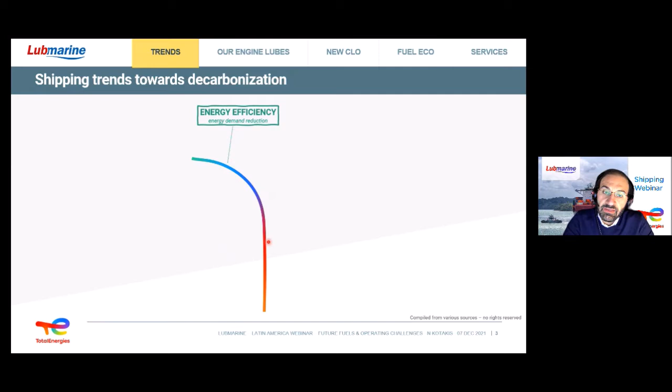So shipping is certainly under scrutiny, is certainly under stress. Everybody's looking forward to this decarbonization. Wanting it or not, it will be there and it will accompany all our actions in the coming years and maybe the coming decades. And the most important is to see, when we talk about decarbonization of the shipping industry, what are the big categories in this. So the first one is the energy efficiency. Clearly, when we want to reduce our CO2 emissions, we have to reduce our energy demand. This is straightforward, this is clear, and this is the first of the 4 pillars of the decarbonization, the way we see it. The second big pillar is the propulsion efficiency.

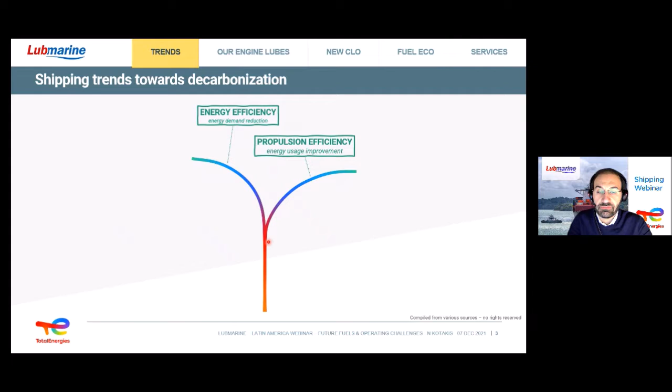So, assuming that we have done everything we can in order to reduce the demand, the next pillar in this process of decarbonization is to improve our energy usage, is to become more efficient. And in the case of the ship, this goes back to propulsion. The third is self-explanatory, the use of low carbon energy. So apart from the efficiency efforts that we did in the first 2 pillars, in the third one, we change the fuel itself, the energy source itself, into sources that are less carbon intensive. So this is our intervention on the carbon intensity of the energy source that we'll be using.

And the fourth pillar is the carbon capture, which means how we can capture all what is emitted as CO2 from our ship after having followed the path of these 3 pillars before reaching the capture, the fourth one.

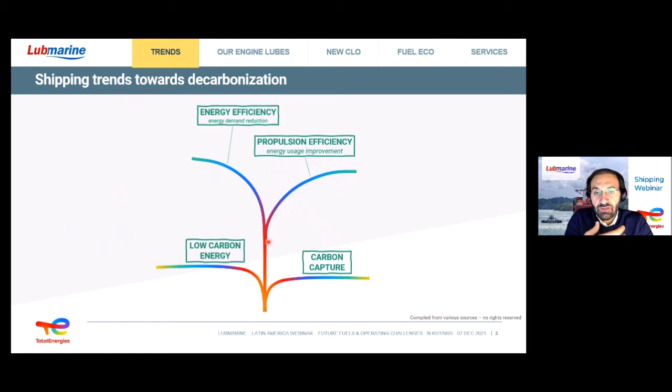So when it comes to energy efficiency, we can split this into 2 big branches. The one is the vessel design, and vessel design is a one-off process. It is linked to the genesis, to the very construction of the ship, with the form optimization, the optimization of the ship size dimensions, the weight, the use of materials, the use or not of a bulbous bow, new hull coatings, air lubrication, and so on and so forth. All this gets under the category of vessel design in energy efficiency.

Then we have another part which has to do with the operation of the ship. So the first one is design, the second one is operation. And in the operation, we find all the measures that we have to employ in order to improve our efficiency, like the speed reduction, advanced port logistics so that our port calls will be shorter and our standby time outside ports will be minimized, the weather routing, the cleaning of the hull, the propeller cleaning and polishing, and so on and so forth.

These are known to the market already because this is what we know as EEDI and EEOI, which will become EEXI, so the Energy Efficiency Design Index and the existing ship index as well. Now, moving to the propulsion efficiency, we focus more on the powertrain. So the powertrain is the engine, the propulsion, and the shaft machinery in the propeller.

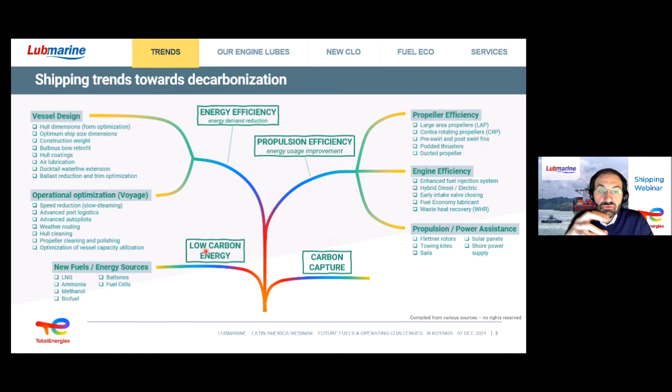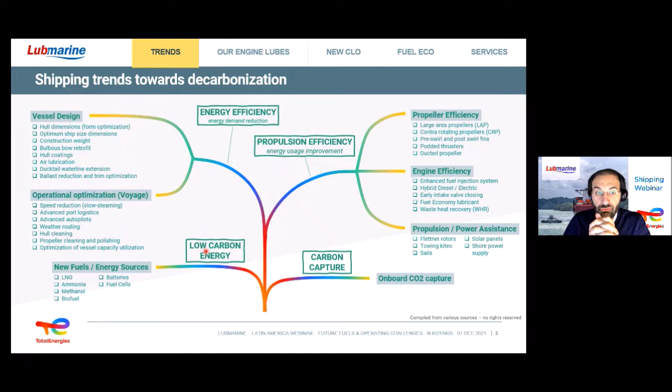Now, moving to the low carbon energy, things are pretty straightforward. What you will see here is new fuels and new energy sources. So we have LNG, ammonia, methanol, biofuel. You've heard this already in many different fora, in different conferences. We have also new energy sources like batteries or fuel cells. And finally, the carbon capture, which is more of an ambitious future development, relating to onboard CO2 capture.

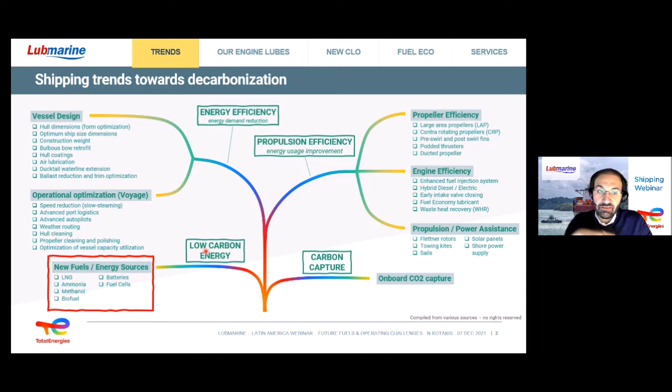Now, in the next slides, I will focus a bit more on the new fuels and energy sources because I think this is what seems to be a driver in technological development, knowing, of course, that the energy efficiency and propulsion efficiency are very important, but have already been covered very well, and there are many known and mature solutions already out there in the market for the operators to use.

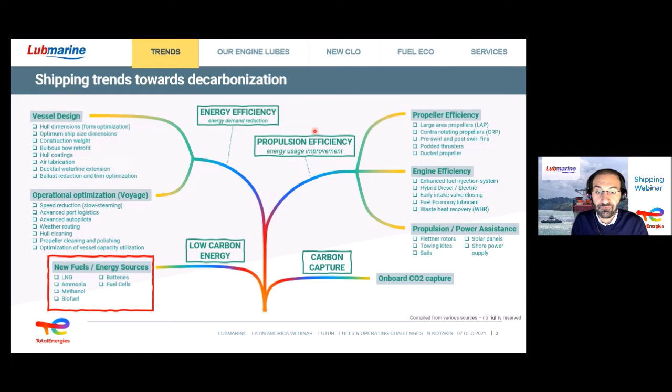But before talking about the new fuels, we have to talk about the new engines. So there are efficiency evolutions on two-stroke and four-stroke engines, and they can be split into categories. We have the incremental evolutions of the internal combustion engine, an engine which is well known. It was designed by Otto back in the 19th century. Then we had the Diesel cycle by Rudolf Diesel, the Otto cycle, then the Miller cycle.

Since the time of Rudolf Diesel, many things have been improved, and we still continue to improve all these small parameters like turbocharging, variable port geometry, smart control, electronic control of the engines. We have an increase of the mean effective pressure, and we are working on the reduction of the friction losses of this engine.

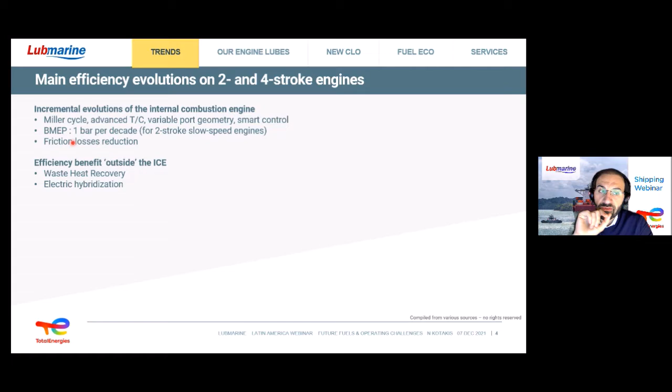At the same time, we have the energy efficiency outside the internal combustion engine, so a post-treatment efficiency related to the waste heat recovery or even to electric hybridization. Now, I would like to focus on 3 points here. The first one is the mean effective pressure.

So we see over the last years how much the pressure has raised, because the pressure is directly linked to the performance and to the efficiency and to the specific fuel oil consumption of the engines. So the higher the pressure, the lower the consumption. So it's a key part of the engine efficiency.

Now you see that in the next coming decade, we should expect another increase of about 5% in the pressure. And this is something that we see both, let's say, the two bigger OEMs in terms of sales, MAN and WinGD, converging to this possibility for the future engines.

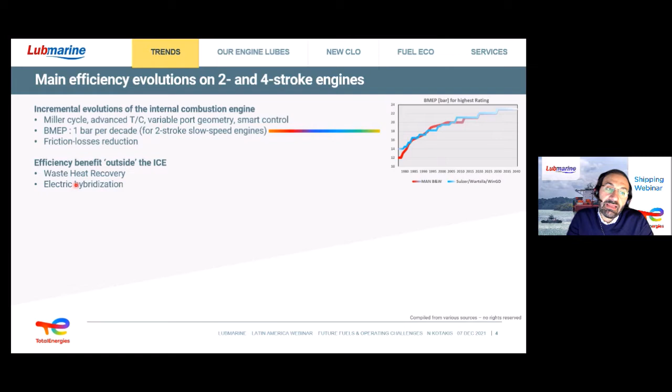The second point I would like to note is the electric hybridization, because this is linked to a potential electrification of the powertrain. And this can be very promising for an efficiency increase. And you see here how this could be the arrangement in an engine.

So you have a main engine connected to a shaft generator, which at the same time, if it is given energy, it can be turned to an electric motor. And then from the shaft generator, we have the battery pack, frequency converters, and we have the auxiliary engine. So with all of the systems, we can either move power from the main engine to the system and to the batteries, or from the battery pack back to the shaft propeller and to the propulsion of the ship.

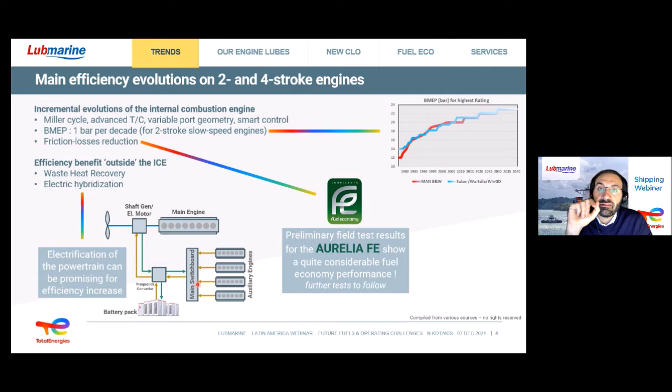And the third point that I would like to underline here is the friction losses, and this is directly linked to the development of fuel economy lubricants. So fuel economy lubricants show a considerable performance, at least the one that we have designed; it is very, very promising. There are further tests to follow.

In the coming slides, in this part here, where you see on the top right side the fuel eco, I will give you some more information about what we've already seen and what we aspire to see in the future in the field of a fuel economy 4-stroke engine lubricant. And I would dare to say, of course, that they are certainly an option to consider given their interesting cost to benefit ratio.

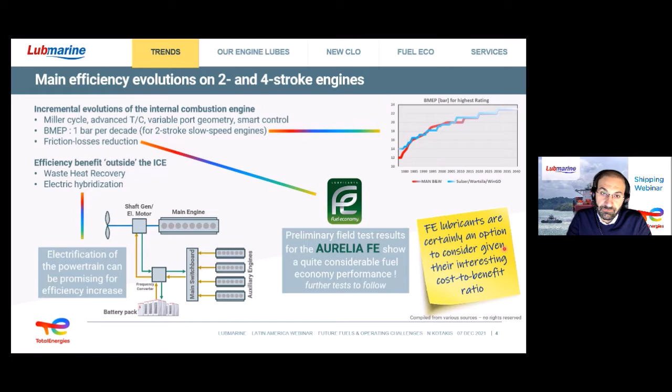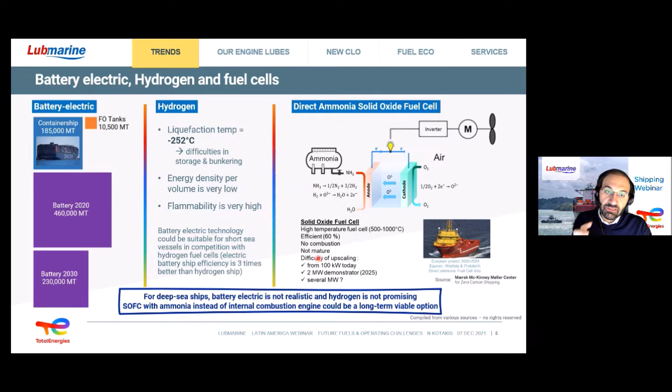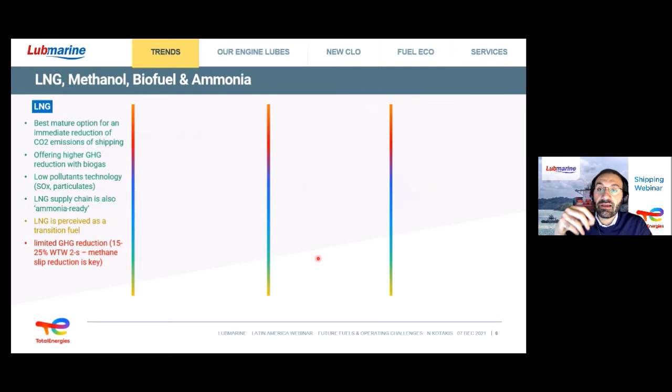Let's go a bit closer to today, where we have the LNG and other options that we hear in the news and in scientific papers all around: the LNG, the methanol, the biofuel, and the ammonia. So LNG is the best mature option for an immediate reduction of CO2 emissions today. We know this. We know that it has low pollutants. It's a supply chain which is well established and it can be also ammonia ready. So there is a link with the future option, but it is still perceived as a transition fuel with limited reduction of greenhouse gases.

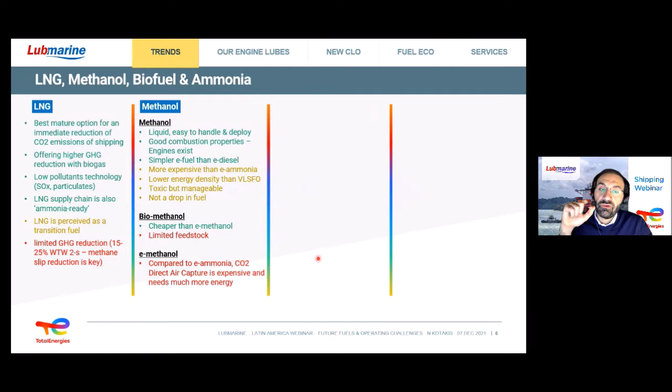The methanol, there are different options, different derivatives, the pure methanol, the biomethanol, the e-methanol, all of them have their own set of advantages and disadvantages. We would say that the most difficult part in methanol is that it's not a drop-in fuel. We cannot use it right away. There is a lower density, of course. It is more expensive, but it could be an option. So keep this, that methanol seems to be a viable option.

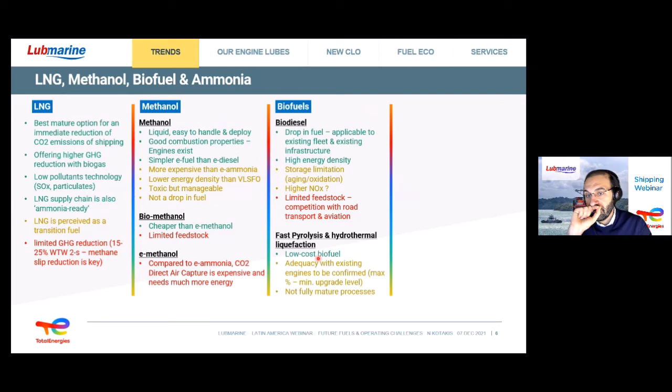Biofuels as well, especially the biodiesel, can be an option, can be a drop-in fuel, which means that we can use it seamlessly with the fuels that we have today. It has a high energy density, but there is a limited feedstock and there can be a huge competition with road transport and aviation. So this means that when the demand of a commodity like biofuel increases, the price will increase as well, because we have a limited feedstock, which means that we cannot increase the supply at the same time. So most probably it will be used at more premium prices at different markets.

Finally, the ammonia, the NH3, is the real zero carbon fuel. It can be used in combustion with a dual fuel engine or used in the SOFC configuration, as I showed you in the previous slide. There is no apparent competition with other transport modes, so it can be perceived clearly as a fuel of the future. Now, all of them have, as you see here, a set of advantages, some considerations in yellow and some disadvantages in red.

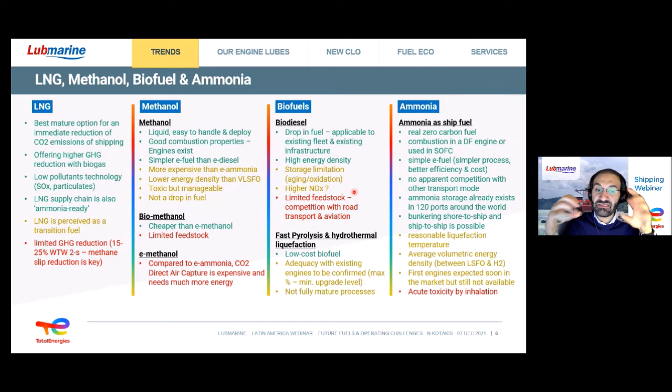This is not an exhaustive list of advantages and disadvantages, but what I aimed at showing here is that all of the above solutions are expected to be employed by the shipping operators in the future. What cannot be said for now with certainty is the adoption rate of each of these solutions, because it will depend on a series of technical, economical, and logistical factors.

If I had to make a forecast, I would say that most probably we'll move from LNG to a bifold solution between methanol and ammonia. And biofuels, given, again, the competition with other markets, could be a bit less interesting for the shipping market, at least cost-wise.

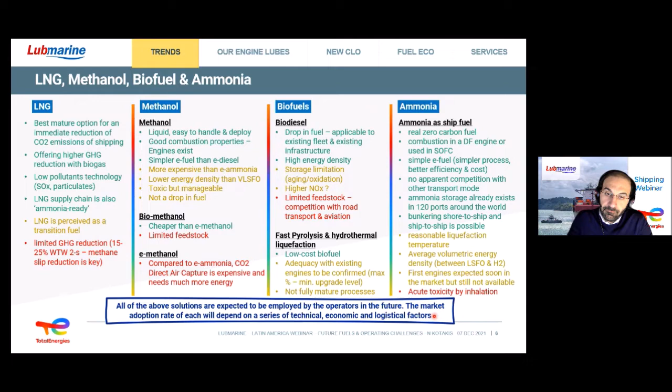Now we'll move on to a quick overview of our engine oils portfolio. And I would like to start by seeing our Talusia range and the product commercialization timeline. So you see our Talusia is our flagship range. It is our cylinder oils used on two-stroke engines. And the development of our grades is certainly linked to the sulfur content of the fuels. And in the sulfur content of the fuels, we have to see the global sulfur cap and the sulfur emission control areas.

So for the last 20, 25 years now, we had Talusia HR70, our BN70 grade, which along the years was covering different ranges of sulfur content. This is also linked, of course, to the engine design. So we have the BN, the Talusia part, the sulfur content in the fuel, and also the engine design, and they all interacted together in order to give us the ranges that you see here for all of these different grades.

Along those years, we also had LS40. So you see that these are two grades, the BN70 and the BN40, which have run through almost a bit more than two decades, maybe even more than that. And they have been covering the market at different circumstances for different limits.

Around the year 2007, we had the introduction of Talusia Universal, which today seems as the perfect fit between ships that are operating on VLSFO or even dual fuel engines, and even in some cases as a low BN for scrubber equipped engines. We will see more about Talusia Universal in the future because it is a solution which certainly answers to many of the customer and operator needs.

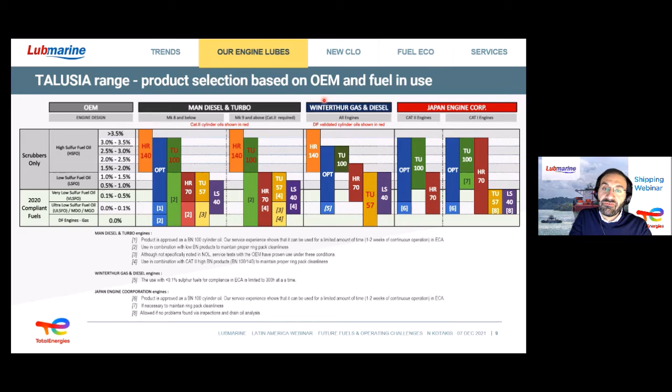So the Talusia range, as I said before, has 6 products in our portfolio to cover all your needs. You don't have to remember this by heart, but you have to know that our marine lubrication engineers, our local sales teams, and our local technical correspondents are in position to help you in choosing always the right solution, irrespective of the engine that you have, whether it's an MAN engine, a WinGD engine, or a Japan Engine Corporation engine. We are there to provide the right solution based on the engine design and the fuel you're using.

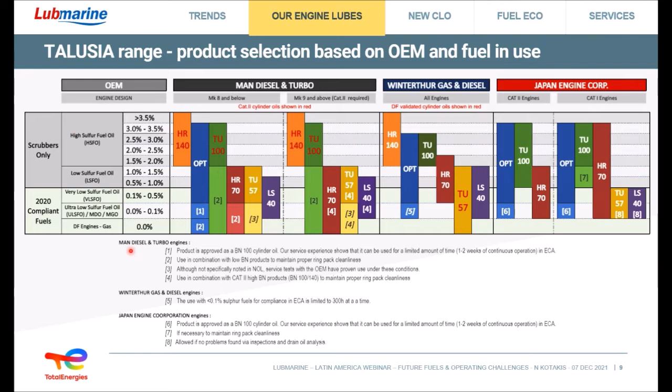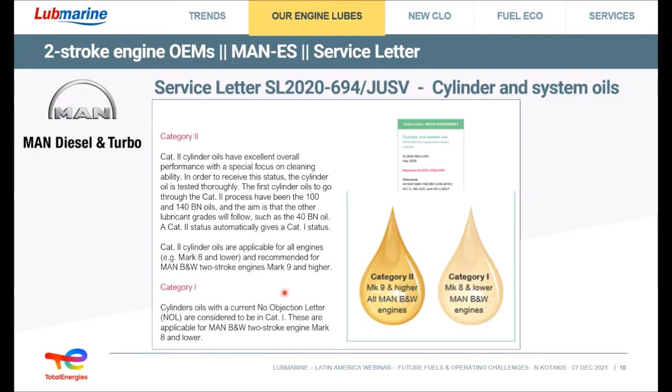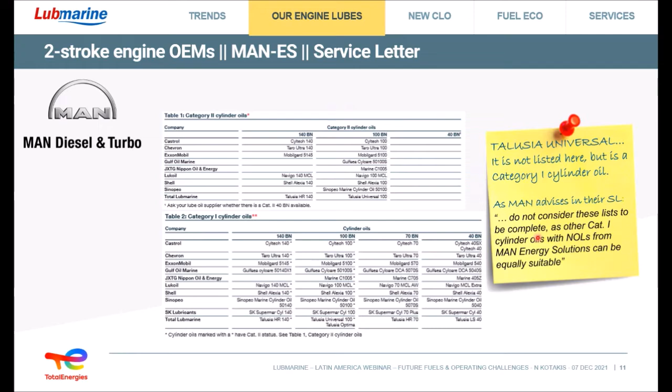I would like to focus a bit more on the 2-stroke engine makers, in particular MAN and WinGD. MAN, with the service letter issued last year, service letter number 694, introduced a 2-tier product market with category 1 and category 2 cylinder oils. We are working on developing cylinder oils, low BN cylinder oils, in category 2, and this is the part I will be showing you in the next slides. But keep in mind that Talusia Universal is not listed here, as it is a category 1 cylinder oil. You should not consider these lists complete, because there are other category 1 cylinder oils with no objection letters from MAN Energy Solutions that are equally suitable, and I'll show you the no objection letter later on.

WinGD is following a different approach, but at the end of the day it is very much aligned. They're both still allowing 15 to 25 BN oils for operations in dual fuel engines, so either LNG or up to 0.1% sulfur, 40 to 60 for anything up to 1.5%, and so on. So BN 140 is what they propose for anything above 3% sulfur.

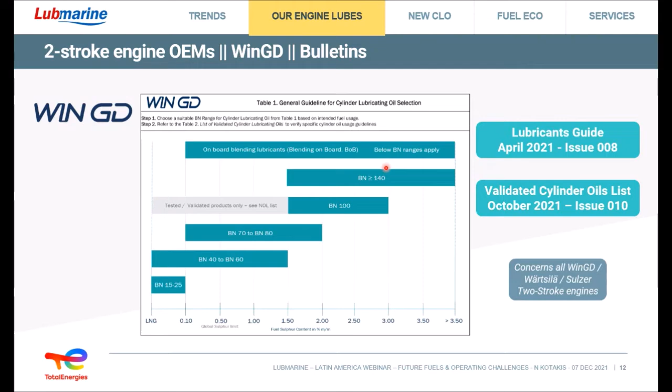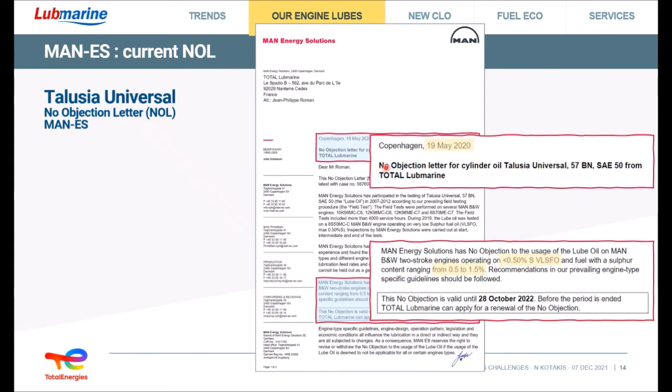So why do I insist on Talusia Universal? I insist because it is the single cylinder oil solution for all 2020 compliant fuels. And we have a no objection letter from MAN since May 2020 that validates Talusia Universal can be used on any engines operating on less than 0.5% sulfur and anything from 0.5 to 1.5%. And we have the same no objection letter from WinGD.

This is even more valuable for us because with Talusia Universal we managed to run also a DF validation. So it is DF validated. It's one of the few cylinder oils which has been validated for dual fuel engines by WinGD.

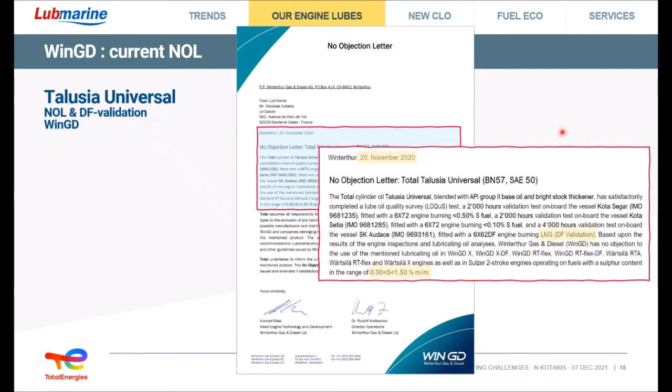I will now speak a bit about our four-stroke engine lubricant selection, and I would like to focus on three key parameters. The first is that when you select a four-stroke engine lubricant, you have to know what the OEM is, because the OEM will influence the kinematic viscosity, whether it is SAE30 or SAE40.

The second is you need to know the fuel, because based on the fuel we'll have to choose the BN to match the more severe condition. So if it is intermediate fuel oil or heavy fuel oil with scrubbers, we'll have to go to solutions like BN30, 40, or 55. If it is a VLSFO, anything between 20 and 30 should be okay. Distillates from 12 to 15, and pure gas, anything from 4 to 7 BN.

And the third is, of course, the trade, because the fuel that you use today doesn't necessarily mean that you will use it tomorrow. So we have to have this information related to where you will be running your assets, your ships, so that we can give you the best possible advice in choosing the right product for your engine and operation.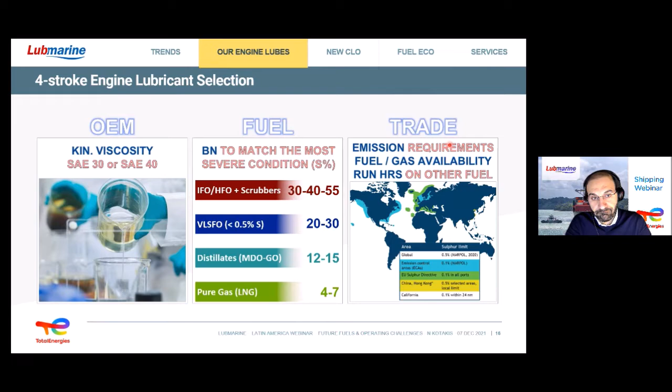Our series is a complete series, so anything you need is there. From bottom to top: Aurelia LNG for pure LNG operations, Disola M with BN12 or 15 for distillate operations, Aurelia TI in BN20 and 30 for VLSFOs, and Aurelia TI in BN30, 40 or 55 for IFO, HFO together with scrubbers.

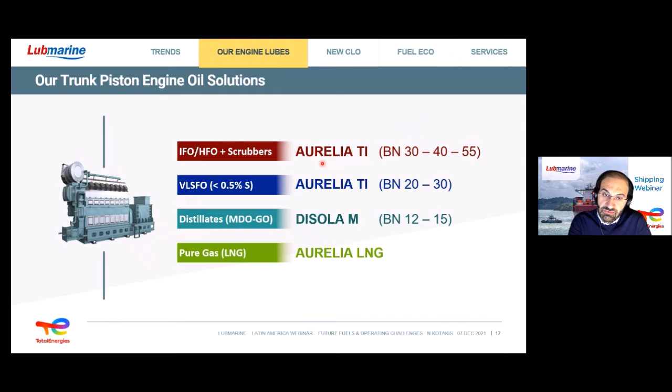Now, I told you before that I would talk about our new product development. Our new product development projects are very much at the forefront of technological advancements, and this is necessary because anything that we develop will have to be used today and tomorrow.

So we have to take into consideration the newer engine designs and the newer operations when it comes to designing a cylinder oil. We have three OEMs: MAN, WinGD, and Japan Engine Corporation. And we see that all their engine designs are covering different operational and environmental factors.

The operational factors are straightforward: better reliability, extending the maintenance intervals, higher engine ratings and combustion pressures for fuel efficiency. And of course the environmental factors related to emissions control and the use of alternative fuels, so that operators can have a lower carbon footprint.

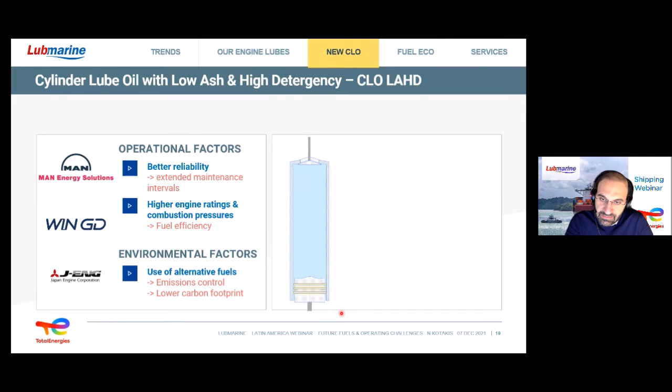So we see on the right-hand side a cylinder. As the piston goes up, everything takes place within a very short space, which is the top land and the ring lands. This is the key cleanliness parameter for a new cylinder oil. We need to keep this part clean, because as soon as we keep this one clean, the engine would be running smoothly. This is what our experience shows over many years of product development.

The same applies now also on the exhaust valve. We have to make sure that the exhaust valve stays clean and the whole post-treatment system is not polluted by the cylinder oil that we will be using.

So the key specifications for us for any new cylinder oil is the deposit control. Make sure that it contains low ash content, and the cleanliness—we need it to have high detergency. Thus, our project development has been codenamed LAHD.

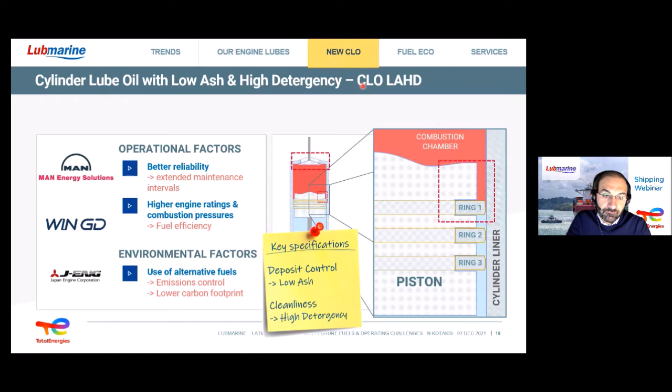Now, we have to understand the importance of keeping these ring grooves clean, because we hear it all the time: it has to be clean, everything takes place in the top ring and the ring groove, but we don't really understand why. So you see here two photos.

The one is the clean engine ring movement, and the second one is with detergency problems. To understand what's going on, when everything is clean, the pressure of the combustion chamber passes at the back of the ring and pushes it against the cylinder liner. As soon as this is accomplished, we have very even and balanced stresses on the ring, shown here in red color. This is schematic, of course. You don't have to take it one by one, but understand the concept that the pressure needs to be evenly distributed as the OEM has designed it. And you see here in yellow the cylinder lube oil film.

If there are deposits, we start to have rings that stick, and as soon as they stick, we have a loss of pressure at the back of the ring, and this loss of pressure allows blow-by gases to pass at the front of the ring, pushing it and creating back pressure on the bottom of the ring. There is a ring collapse danger in this situation. This is why we have to avoid these deposits, to make sure the rings do their job. If the rings are not doing their job, then half of the game is already lost.

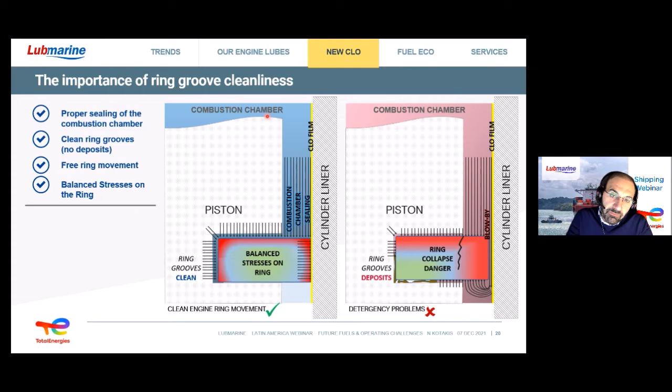As soon as we have a proper combustion chamber and clean engine ring movement, we have proper sealing of the combustion chamber, clean ring grooves, free ring movement, and balanced stresses on the ring. If we have deposits, we have limited and sticky ring movement, combustion gases blow-by, imbalanced stresses, and the risk of ring collapse.

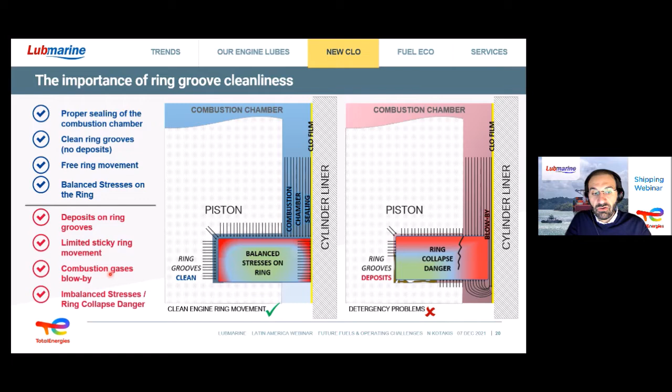So the project approach for us has been to keep the ash content low for a BN level at about 40, boost the cleanliness performance, make sure we work with components that are mature and available worldwide, and of course always respect the HSEQ compliance of all components that we use.

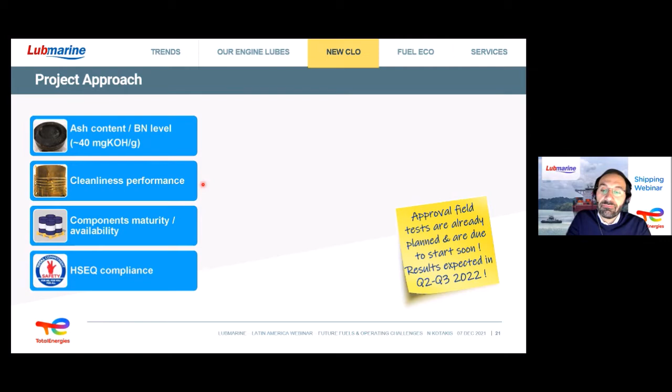We have been working on this for over a year now. Approval field tests are already planned and due to start soon, with results expected in the second and third quarter of 2022. I hope I will be able to meet you in person by that time and be the bearer of good news on our product development, on our new cylinder oil development.

I would like also to give you a few words about our fuel economy development on our four-stroke engines, the Aurelia series. So the classic Aurelia TI that I showed you before has an additive package containing detergents, dispersants, and anti-wear with a base oil mix, and it is mainly an SAE40 monograde lubricant approved by the OEM.

In the development of a fuel economy product, we had to add a new detergent mix, a new friction modifier, and also viscosity modifiers. So there is a brand new additive package and brand new design philosophy. It's a design philosophy that is the first time anyone has ever dared to try in a marine engine environment. This gives a multi-grade lubricant, which is currently not approved by the OEMs.

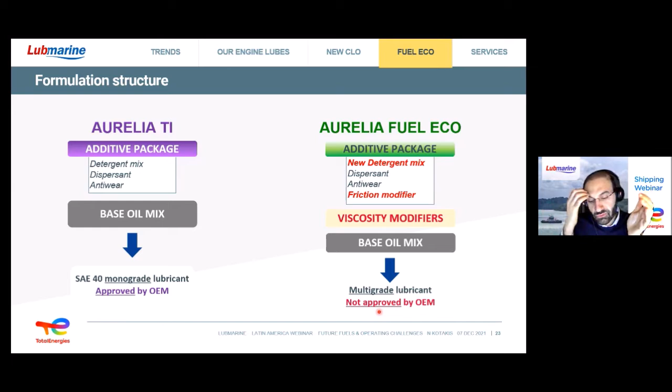We hope, of course, and we are in talks with all of them to start tests in the coming months on this. But we did run one fuel economy test to make sure we have a proof of concept, validating that what we have been developing makes sense and produces results. I will not enter much into the details, but I'll be open to discuss with you individually if this is of interest.

But I think the big picture is that we ran it on a ship equipped on a RoPax, a ro-ro passenger vessel, equipped with 4 engines. On every set of engines, we tested it one against the other, so the Aurelia fuel economy against the standard Aurelia TI, and we did the same on 2 sets of engines.

And we added mass flow meters, Coriolis flow meters, on all of these engines, one by one, to make sure that we can accurately measure the fuel consumption. And depending on the engine output, we measured an average of 4.7% of fuel economy. It's huge. It's something that even we ourselves would not expect. We, of course, want to verify this through more tests.

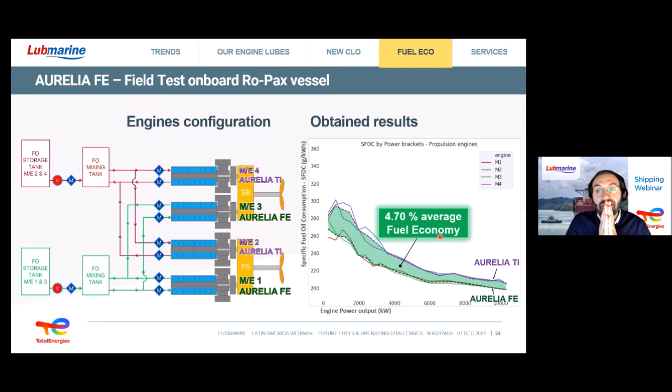And if you're interested to participate in the field test trials for this new fuel economy lubricant, please do contact us, because we want to gather as much information as possible. We will not market it with this fuel economy, but this is a very good indication, and this gives us the courage to continue to move on and try more tests to see what it gives us.

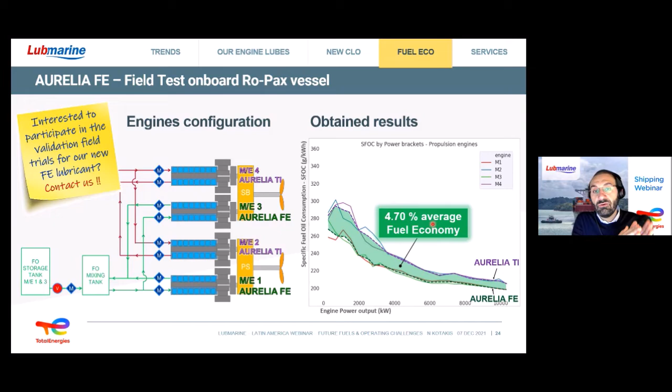Once again, 4.7% of average fuel economy based on this particular ship and the load profile of its engines.

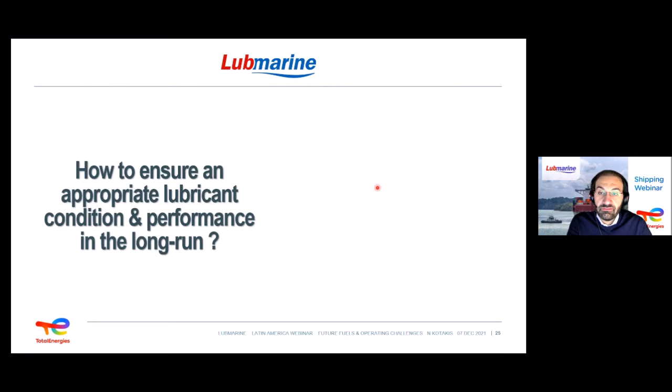And as I always like to close my presentations, I would close this with a question: how to ensure that the lubricant is in appropriate condition and performance in the long run? And the only solution for this is through monitoring services. Paulina already mentioned it in her introduction. There is a complexity. Lubricants and products are only one part of the equation.

Services is the second, because we can use a great solution, but if we do not follow through, the solution will not work the way we expected it to. So we need to rely both on the product and on the monitoring services. So on our side, Lubmarine, we're offering a full lab analysis scheme with a complete set of onboard kits for a comprehensive analysis of trends with the assurance of our technical expertise. For any complexity, we are here to help you and would be glad to do so.